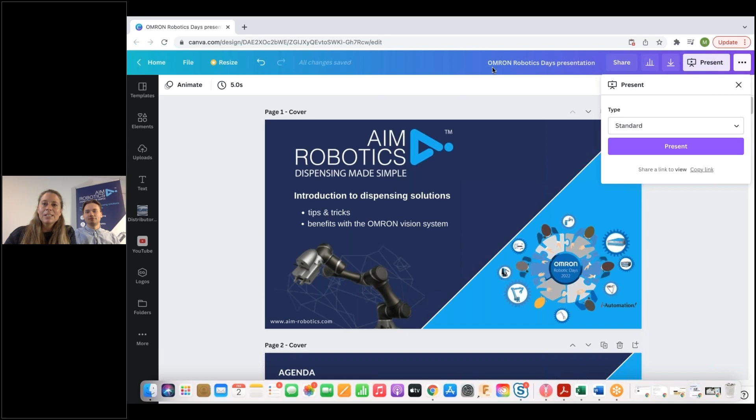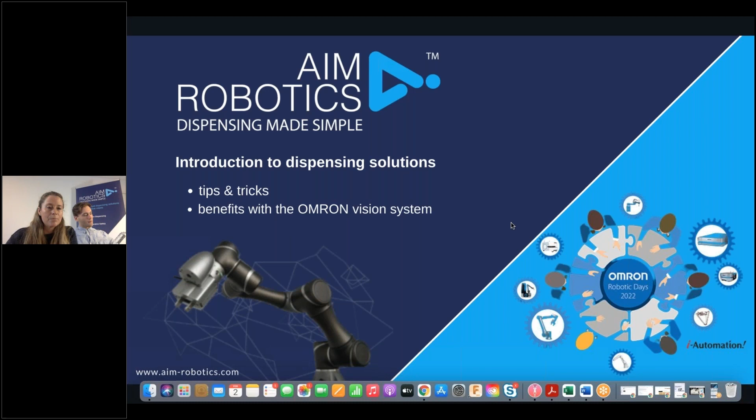Yes, we'd like to introduce AIM Robotics Dispensing Solutions. We want to give you an introduction to some of the dispensing solutions available, some tips and tricks, and then show some of the benefits with using it on the Omron collaborative robot. Yes, the agenda with tips and tricks and benefits and things to remember.

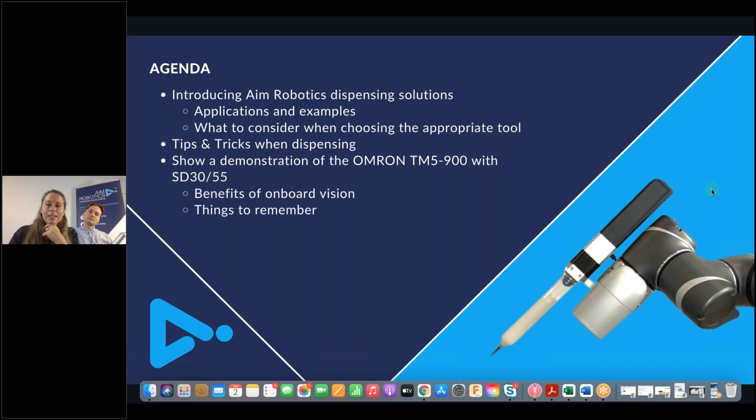So going through some of the issues with manual dispensing: manual dispensing is basically a difficult task to get through. What makes it difficult is that it's quite based on the operator that's actually there, so how much they press the button and how fast they actually move. So that gives a very variable result. If you go on to traditional automation of glues and silicones, they would come in an XY product, which is very difficult to actually reprogram again.

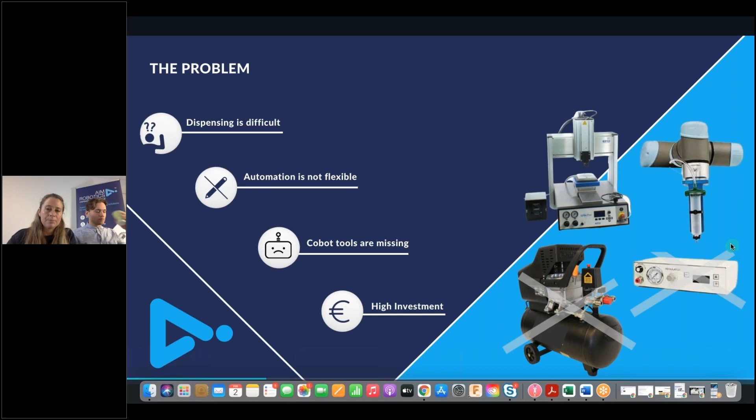Where we come in with some of the benefits is that the integrator and the end user will have less risk with the off-the-shelf units that we provide. We have made tools specifically for collaborative robots. It also means that the integrator will actually save time because of the fast installation to the robot.

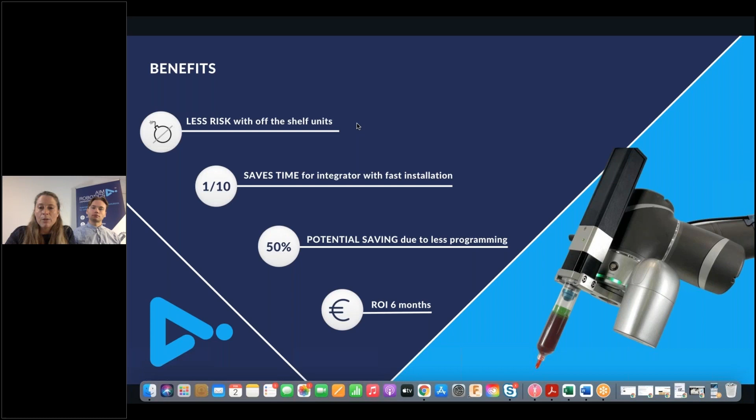This is then also a potential saving due to less time spent on programming and creating the program and interface from scratch. All of this can actually give a ROI of less than 6 months with a robot and everything together.

So what we want to do is create these products that give more flexibility into automated dispensing. We are making plug and dispense products that are very fast with installation. Typically, it's one product or plug for communication and power. Then we have precision, which is provided because our units are electronically controlled. And then the ease of use, because they are fully integrated onto the robots with programs that actually use the robot's own control language and programming language.

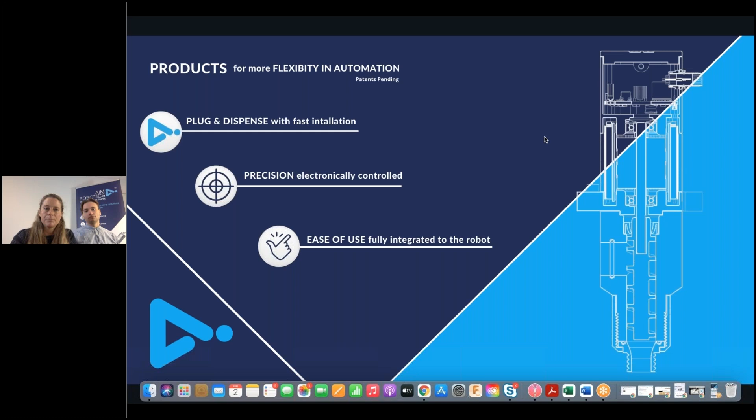So going through our FD series, we have 3 patent pending products. The FD series is a modular built series, which, as you can see, all have the same base unit that you can build onto and reconfigure as need comes. This series can support medium to high viscosity fluids. Some of them use compressed air to feed the dosing pump, but because they're all electronically controlled, as mentioned before, we can still provide precise dispensing.

We have designed them for silicones, acrylics, adhesives, polymers, and greases. And we can, with our programming, ensure that we have a constant dispensing flow in relationship to the speed of the tip and the robot speed. This makes sure you don't have these potential lumps in the beginning and end of a dispensing, and also in corners we can have a continuous volume that is actually dispensed. So this FD solution is a stepper motor that goes down and rotates an auger screw, and thereby deposits the material.

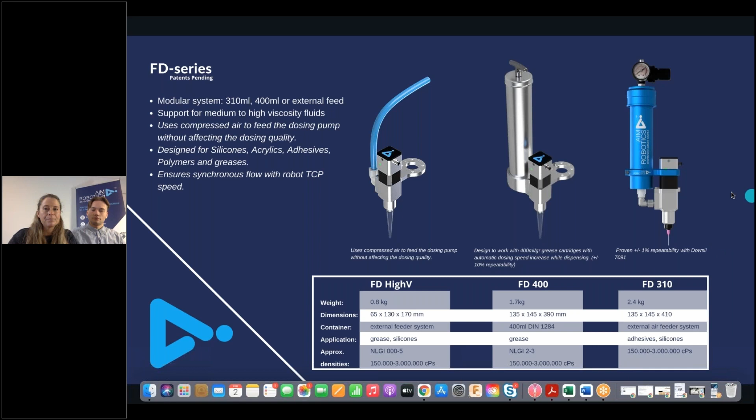Our other dispenser is called our syringe dispenser. This is a completely self-contained unit, which is volumetric. In this unit, we have a stepper motor again that pushes an axle down, and a plunger pushes down the piston in the syringe. The SD3055 is called this because it's made for 30 or 55 syringe barrels that can come filled by the supplier with the material, or be filled on site by the user themselves. They're typically used with the Luer lock tiny needles, so very good for very precise work.

We can go down to dispensing basically micro droplets with this unit, and we can dispense anything as thin as water with it as well, without dripping. What we have here is also the simplicity in use. With plug and dispense, you can be up and dispensing within 10 minutes.

We also have what we call auto TCP speed, where we can make sure that the dispensing speed changes in accordance to the robot speed itself, again making sure that even corners have the same volume dispensed. It is an all-in-one solution, so there is full control through the robots with all the parameters, calling back the piston for refill and things like this.

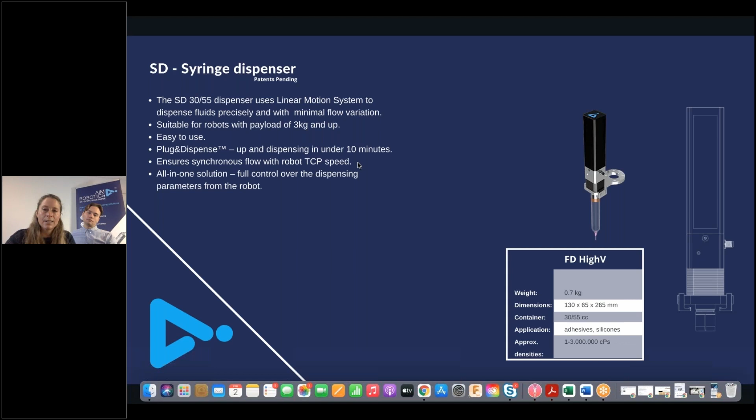Our next product, which is soon to launch, is a need we've seen from the users themselves, which is a product we call the TCP calibration unit. It is to go down and verify and set up the parameters for changing tool center points. So the absolute tip of the unit, for instance with needles or with welding applications, anywhere where the TCP would change during an operation, or when you change needles, things like this.

And after first setting up with a contactless point, it can automatically, as part of the program, go in and reset your TCP. So this is an automated process and not operator dependent.

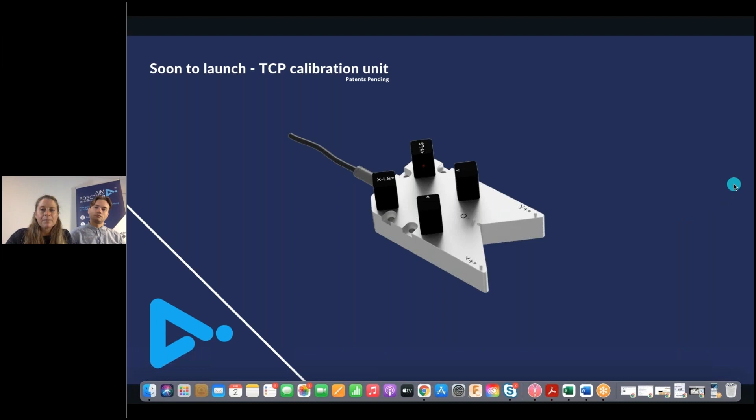Going through some of the examples for applications, we've tested some Novasil, and what the SD30/55 can be used very much for is the electronics industry. Here you could use it, for instance, for silicones, to go down and support the components on the printed circuit boards. We have also sold these units for epoxy, things like this, on electronics.

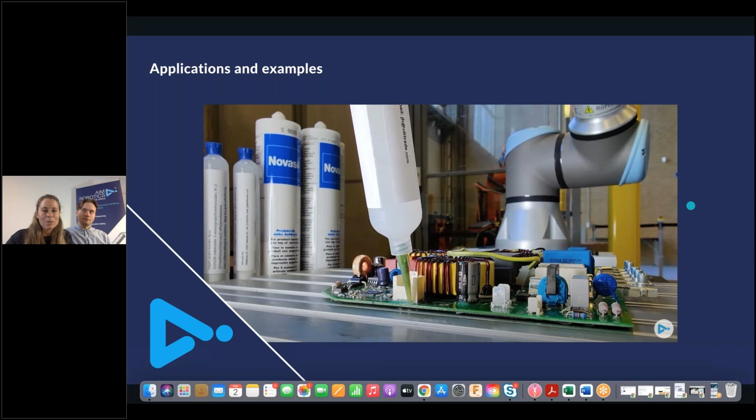And on a separate note, it is also being used for dispensing chocolate sauce on coffees in Spain. But that's very much dependent on what material the holder itself, the container, is made of. So it can be used within the food industry.

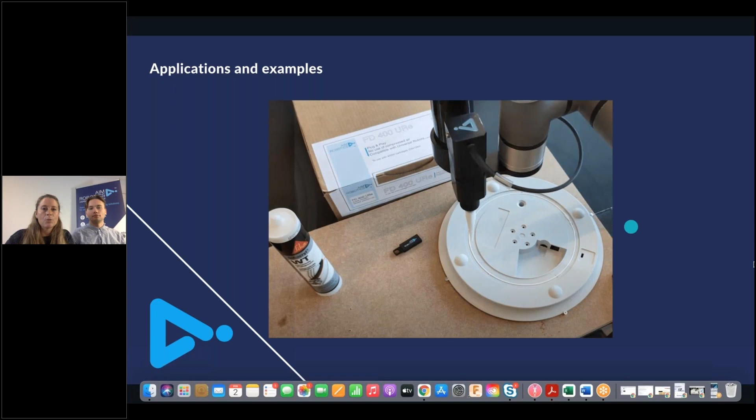Another example is the FD series, which has been used for silicone gaskets in parts, putting two parts together and creating an airtight or watertight seal in assembly. And this is where automation comes into its own, because if you can ensure a constant dispensing volume, you can also ensure quality. And as dispensing is one of the last processes in assembly, it could actually result in less waste, as the parts would not need to be thrown out afterwards, and they pass the quality control.

We also have our unit working for ovens, for instance, dispensing a silicone gasket on an aluminium or stainless steel frame, placing a heat-proof oven glass on top, and creating an oven front in production. Again, showing some more gaskets, or grease in bearings. But pretty much the sky's the limit. Anything that needs to be dispensed can be dispensed, as long as it's fluid enough.

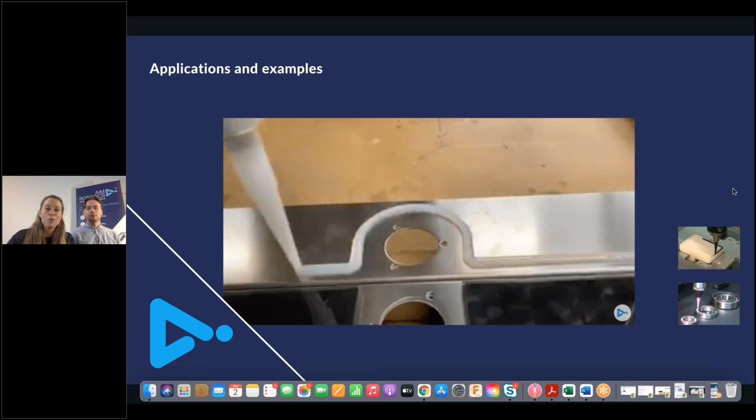Some of the things worth considering when you're choosing a tool, and where we are also very open to being as helpful as we can, is what material you want to use. There are some questions that are good to know the answer to when choosing which tools and how to actually dispense. These are some of the first questions we ask when users come in. First of all, what material needs to be dispensed, for instance whether it's a very thick glue or epoxy, because some of our tools are better suited for different materials. As you can imagine, our auger screw tool with a quick hardening material would not work so well, so there we would recommend another solution.

What's also very useful is to know the viscosity of the material. So ask the supplier for the viscosities and densities of the materials supplied. That also helps to choose what kind of screw would work best in which tool, and which tool you are looking for.

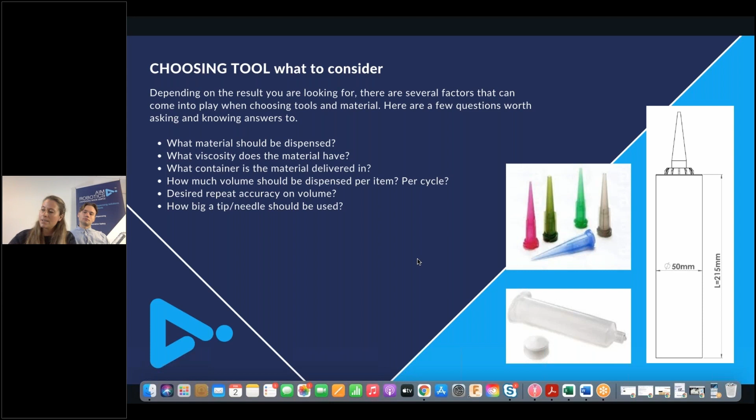We've come to the demonstration we've prepared for today. We've been playing around, finding some good use cases for the Omron, and we have demonstrated it with the TM5-900 with our SD30/55 unit. So what we've been playing around with mostly is the vision system itself, the pattern recognition, so it can go down and see a pattern and dispense a different path depending on what tag it is.

This we find very useful as it makes life very much easier for the end user, not having to change programs, but to make sure that it only dispenses what you have pre-programmed it to do when it recognizes a pattern. That's very useful. Another benefit we could see with the vision system is the quality control possibilities. So having the vision system understand what a fully dispensed solution shows and verify after dispensing if it is actually done as specified. We haven't had time to look into this in much detail, but this is one of the features that we think is very useful within dispensing.

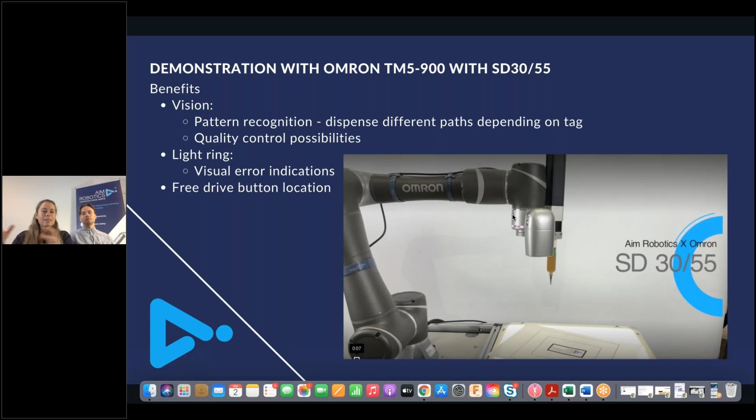The light ring as well, as you also know, is really great for visually notifying the user and the operator of the status of the dispensing, and if there are any errors, indications as well. For dispensing and, for instance, setting the TCPs and making paths, we really enjoyed the free drive button at the tip of the robot, as it makes the movement so much smoother. Okay, I'm just going to talk through what we actually did on the video, and then I'll share the video afterwards.

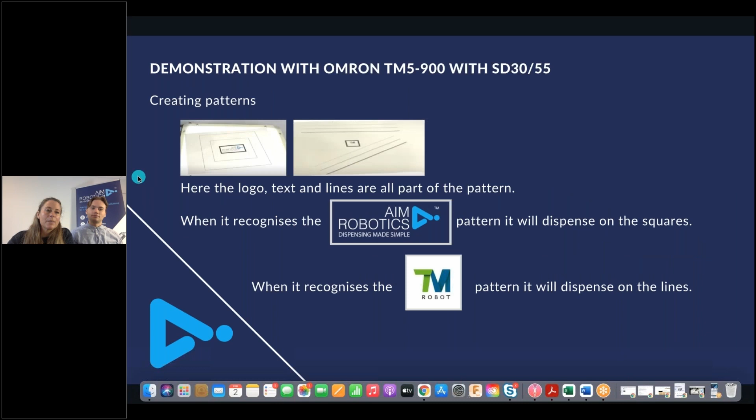So first we created the patterns, and here we chose logos and text to be part of the pattern itself. So when it recognizes the square with the AIM logo in it, it would dispense squares around it. And when it recognizes the TM Omron logo, it would dispense the lines as shown here above. Whoops. Actually, no, let's do the tips and tricks. Then I'll show you the video afterwards.

What we found with this is the importance of constant lighting, because as with any vision system, any change in lighting could interfere with the vision itself. So we kept that very constant for better recognition. We also found the distance between the pattern and the vision system to be of importance. So the closer it can get to the pattern, the better, so it understands it better and produces a better result.

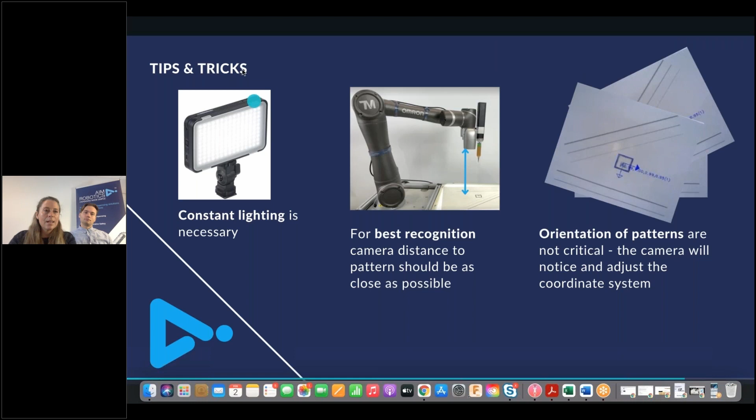What is really good is the orientation of the patterns, and you can see in the videos as well, that it doesn't have to be located in a set XY coordinate system. The vision system goes down and realizes the angles itself and dispenses accordingly. And this was really, really great. So I will see how I get out of this so I can show the video.

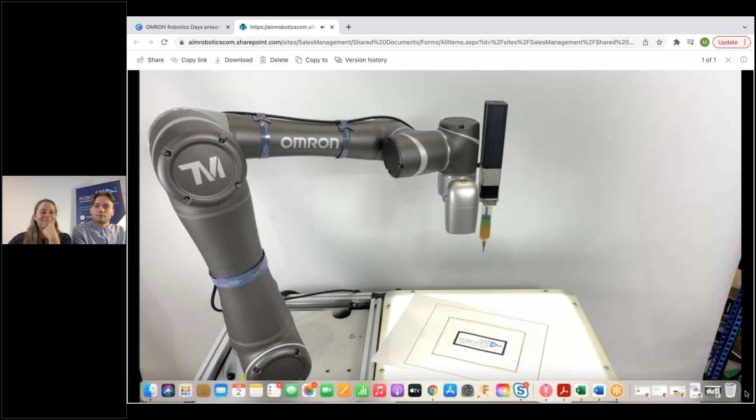We just finished with our presentation. If anybody's got questions, I'm trying to see if you can see us. Yeah, they can. There we are. Yes. So I take the moderator rights back from you and make me the presenter, so I can share the questions and answers for our audience here. Yeah, very interesting presentation. And we have also some questions in the background.

The first question we have is about testing. If someone wants to test your application kit, how is it possible? Do you make a proof of concept in Denmark, since you are located in Denmark, or send test equipment out to the customer? What's the best way to make a test?

Yeah, that's a good question. It varies very much with the material choice, I think is very important to say. What we experience is that we get people asking us what material they'd be using, or telling us what material they'd be using, and then we can judge in-house which would be a better solution. And then depending on what material, we sometimes do in-house tests where the customer would send material and we test it. And sometimes it makes better sense actually renting out a demo unit that can be tested on site